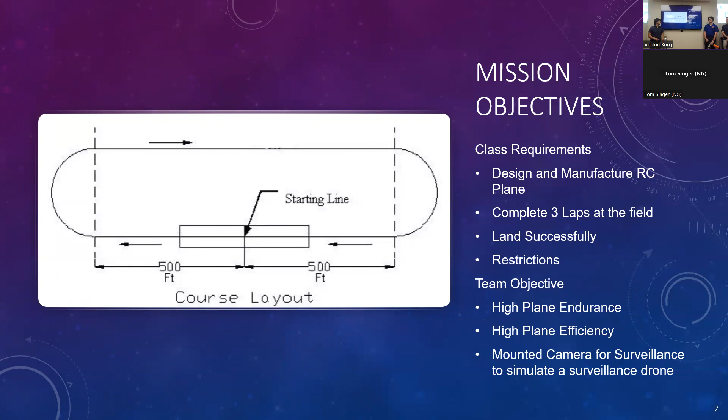And so with that, we wanted to do a high efficiency and high endurance plane, much like modeled after the U-2 spy plane. And we thought maybe in the end, we could also mount a camera for surveillance. And so that brings us to our preliminary design.

So to begin, we had to create some initial estimations for what our final plane would look like, just to get started. So we estimated a gross takeoff weight of around 7.5 pounds, and we used a similar structural coefficient from the Joker plane, which is a very successful RC aircraft that was created to be 3D printed. And so using a lot of similarities from that aircraft, we were able to create our initial estimations.

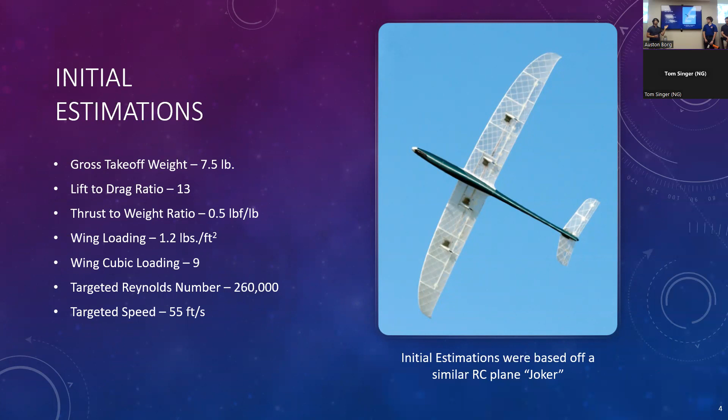We used a very common metric for RC aircraft known as the wing cube loading. It would have a score of 9, which gives it a speed a little bit higher than that of a trainer aircraft. The wing cube loading tells you what the flight characteristics of your RC aircraft will be. Using the wing cube loading, we were able to find our wing loading as well by finding out the wing area needed. And we were also able to figure out our target speed and the Reynolds number at which we would test all of our airfoils.

Okay, and so going on to our airfoil analysis, we chose between separate airfoils, the Clark Y, Clark Z, SD7062, GOE 389, and GOE 425, and these were analyzed at the Reynolds number as before. And it was pretty obvious from our analysis, which we did in XFLR5, that the SD7062 would be the best airfoil, mostly for its better stall characteristics, because it stalled at a higher angle of attack than the rest, and it had the highest maximum coefficient of lift at that Reynolds number of 260,000.

So for our wing sizing and performance, we chose a wingspan of 6.25 feet with an aspect ratio of 8.86. The taper ratio of the wing was 0.46, which yields a mean aerodynamic chord of 0.75 feet. The other parameters of the wing, such as dihedral, sweep, and incidence, were set to 0. This makes it easier to manufacture, and stability can still be maintained through airplane design as well as through pilot input.

The other control surfaces, the ailerons and the flaps, were sized and positioned through historical estimations, with 25% of the chord for the control surface chord size, and the ailerons would have 50% of the total span, and the flaps would have 40% of the total span. This wing configuration yields a trim at 2.1 degrees alpha and a loading of 8.2 pound force.

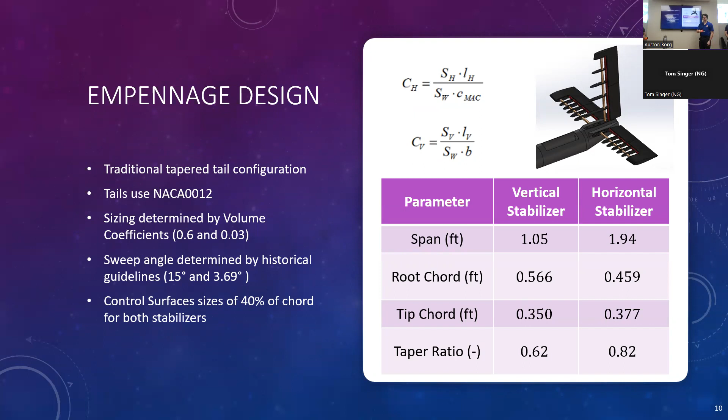And then for our propulsion system, we powered everything with a 4-cell lithium polymer battery and a 50 amp ESC for our proportional control, which was connected to our main propeller. We used a BadAss 870 kV brushless motor paired with an APC 10x6 propeller. Our main prop was located on the nose of our aircraft, and the motor and propeller combination achieved our thrust to weight ratio of 0.5 to 1 at 400 watts and 0.7 to 1 at maximum power. And these thrust to weights were calculated using our initial estimate of 7.5 pounds.

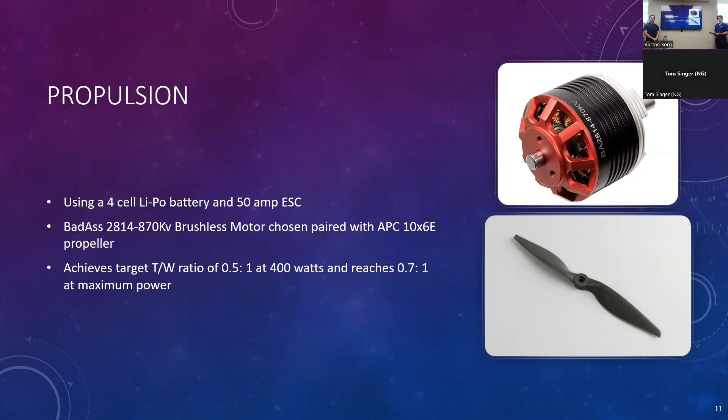They adjusted slightly between plane iterations, as we'll talk about later. We had to add weight for our first test flight, and were able to take off weight by changing our fuselage in our second test flight.

And then for all of our electrical systems, we had the provided 6-channel transmitter and 6-channel receiver. And we ended up using 5 of those channels for our flaps, ailerons, elevator, rudder, and main motor. We had 3 17-gram metal servos, 2 for our ailerons and 1 for our rudder, 2 plastic servos for our flaps, and 2 17-gram plastic servos for our elevator. And then for our proportional control, we had the 50 amp ESC and 4-cell lithium polymer battery, as talked about in the previous slide, and that powered our brushless motor.

So for the structural analysis of the wing, there's 2 load cases we considered. The first was the rapid deceleration that would occur in landing, and the wing would feel that. The second case was max speed and stall angle. We found the max speed and stall angle to be the more significant case. So our max speed was 55 feet per second, stall angle 15 degrees, and we had a weight of 5.21 and a maximum lift of 25 pounds. There we find a lift over weight of around 4.8, so we assigned a load factor of 5.

We use a cantilever beam approximation and assume an elliptical lift distribution at the quarter chord where our spar was located. Our spar was made out of poplar wood, with an ultimate strength of 3,200 psi. We calculated our maximum bending stress from our lift per unit span. We integrated that twice to get our moment, and our maximum moment would occur at the root, which is the equation right here.

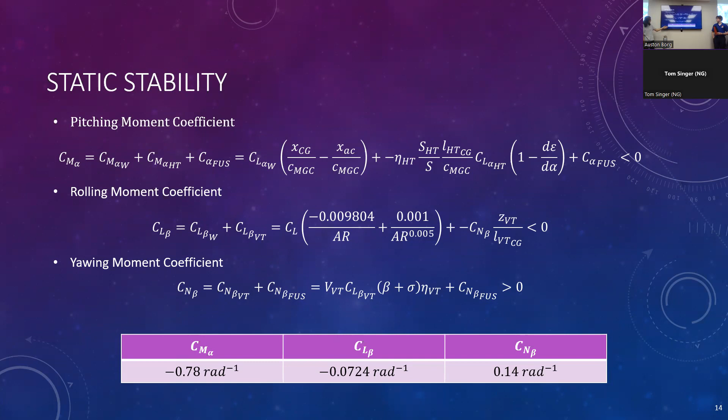The way we used these equations was by choosing 2 values. Because roll and yaw are linked, there are only 2 variables we could close a system of equations with. So we found a value of these coefficients in between a glider plane and a general aviation airplane, and we fixed our pitch moment coefficient. Then from these equations, we were able to solve for where our aerodynamic empennage surfaces should be. And here are the coefficients, all signifying a stable airplane.

Just because you have a statically stable plane doesn't mean it's dynamically stable. The way you check for that is by doing a system of differential equations where your state variables are your velocities and your orientation angles, and the matrices A and B contain the aerodynamic and inertia information. We used the most up-to-date iteration of our SOLIDWORKS file after we made the changes, and we used that in XFLR5 to determine the eigenvalues.

The eigenvalues correspond to different flight modes where, the more negative the real component is, the more stable that mode is. From our analysis, the only unstable mode was found to be spiral, but this isn't an issue as many planes are unstable in spiral, and it takes over a minute to get around 1 degree of bank angle.

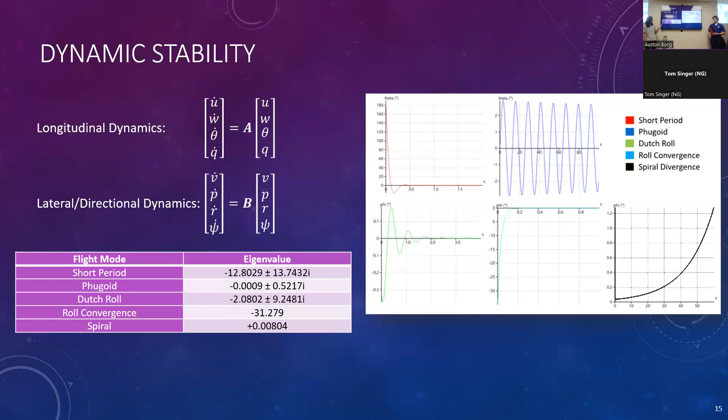The other concerning mode may be the phugoid mode, where it's just barely stable, but we weren't too worried because we were assuming potential flow, and in real life drag is a lot bigger, and drag is one of the major sources of damping of phugoid. That's indicated in our flight cases, where we didn't really see much phugoid. So in general, we had a stable plane.

All right, moving on to manufacturing of the plane. First, we started with the wings. Here is the remaining wing; the other one is not in as good of shape. We used Ultracoat to wrap the wing, which is a very cheap and lightweight option instead of 3D printing the whole wing in PLA. It is easy to cut into and make edits, which is what we had to do for putting the servo motors in for the flaps and ailerons. It was easy to wire rather than having to edit and 3D print whole new parts, which would really have slowed down manufacturing.

The ribs in here are printed of PLA, the spar is poplar, and the stringers are balsa wood. The flaps and ailerons are also just 3D printed. Basically the same goes for the tail as seen over here. The manufacturing was done in the exact same process.

The fuselage was entirely printed out of PLA. It had hatches, about 2.5 inches by 6 inches, so that we could provide access to the battery and bolt the wing and empennage to the fuselage. For the first design of the fuselage, there were none of the stringers or ribs that Drew previously mentioned, because we originally planned to print bulkheads and glue them in. But we changed this design because we didn't have enough surface on the fuselage pieces to glue them all together reliably. So we reprinted them all with little ribs right at all the edges so that we have more surface area to glue to.

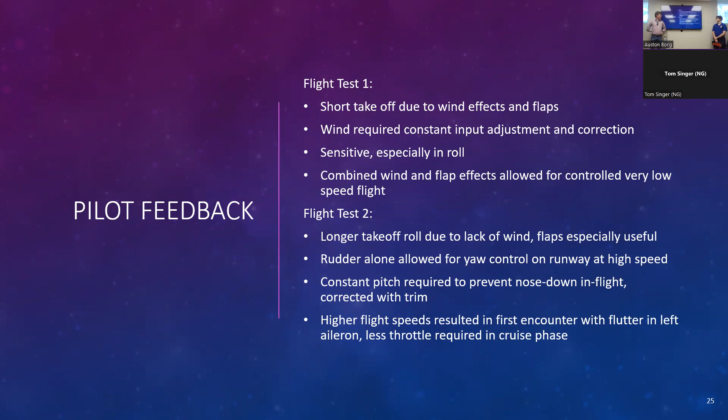During flight test 2, there were higher speeds encountered, there was less wind, so I did not ease as much on the throttle. These higher speeds during maneuvers also resulted in previously unseen effects such as flutter on the right or left aileron here. This is the particular aileron that fluttered. And these are the factors that were encountered in the second flight test. All right, and that opens us up for a Q&A.

Great job. Thank you. Tom. Hey guys, this is Tom Singer. I cringed at the picture of the crispy battery. I'm sure you guys cringed harder in real life, but you know, good job getting it up in the air. Tom, do you have any questions?

Hello? Can you guys hear me? Can you open the chat? Test 1 2. Test test. Can you hear me? Should we open the chat real quick? It seems like there's a message in the chat. No, we cannot. I don't mute. It's a red light. Check his speaker. Is there a speaker on here? This is mute. Should I press this button?

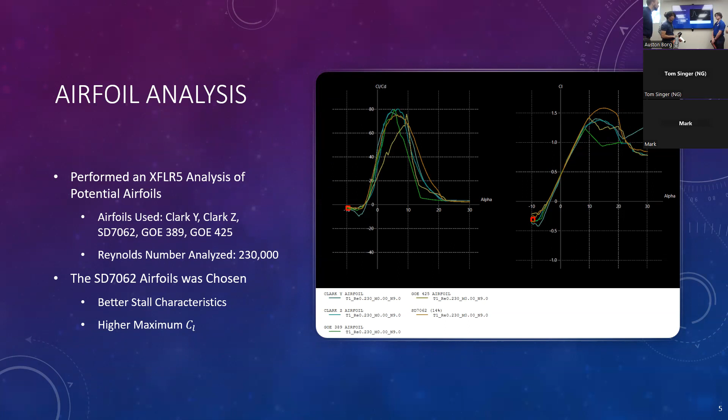And then what I think I was missing was how you get from a moment to a stress, right? So your max bending stress of 760 psi. What is that based on? Oh, just use MC over I. Okay, what cross section are you considering? Circular cross section from the poplar spar running through the quarter chord. Okay, yeah. So I'd like to see that shown here on the slide.

But that said, other than that one part of the chain, I think everything else was good. I like that you talked about, we've got a design factor of safety of 3. We've got a margin of safety based on that design factor of safety. So I think everything went well from a structures point here. I definitely would like to see a little detail of that joint, the geometry of that joint and how the loads get into the plane. But I think what you got here is pretty good.

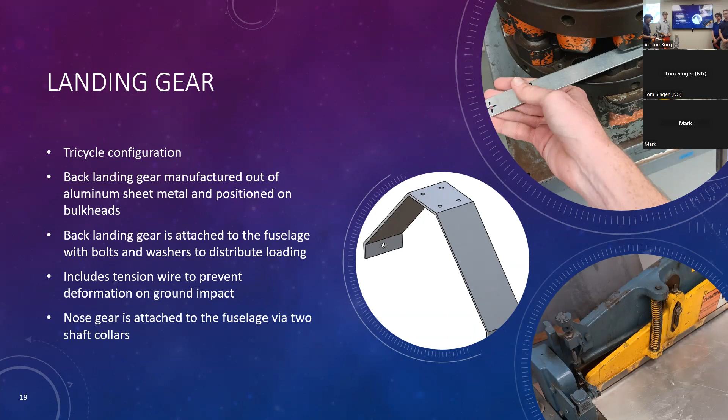And it sounded like you were well under your weight target, maybe even a little too much under your weight target, given that you had higher speeds and flutter, which I'll come back to in a minute. But also, speaking of weight, you said that you had to adjust your CG by adding 13 ounces of ballast to your design, right? And you're talking about an aircraft weight on the order of, what, like 6.5 pounds? Is that including the ballast? Yes, that's including the ballast.

Okay, so you're talking about, I mean, that's almost a pound of ballast, right? So from 5.8 or so to 6.5 pounds, 20-ish% of the weight of your airplane is just ballast, right? Like how did we miss that much on the CG? It was a combination of not paying attention to the size of the nose in comparison to the position of the wing, as well as not considering the amount of weight located on the empennage and the effect it would have on the overall CG.

Okay, so was your CG too far back and you ballasted the nose, or too far forward and you ballasted the aft? It was too far back, so we ballasted the nose. Originally without the weight, it was at like the half chord point. Yeah, we wanted to move to the quarter chord. Okay.

Were you one of the teams from a month ago that said you had some ability to adjust the CG by moving the location of the battery? Yes. I'm guessing that you didn't have enough motion in the battery to get your CG where you need it to be? It was as far forward as it could go. We just needed to make the nose longer. That was the only option.

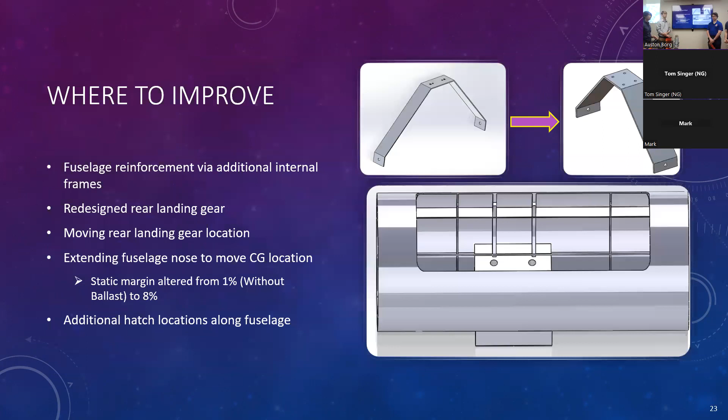Let's see. So, flutter. I've been doing these for a couple of years now, and I know that Ting has done a couple of different RC airplanes, and you guys are the first ones that I've seen have an issue with flutter. So I know you said your speed was higher than you were anticipating, and that can certainly cause those sorts of issues. But did you do any sort of analysis to say we don't expect to have flutter at the speeds you were initially predicting? And do you have a solution for that other than fly slower?

We did not have any predictions for flutter to my knowledge. The particular cases where flutter came through, it was during a maneuver where I went from high altitude to a low altitude-ish pass, where I gained speed by trading altitude. And that was a much higher difference than I was expecting because I was also at higher throttle than I should have been. So combined, those made for higher speed, which had higher flutter on this left aileron.

One issue was our wing was not stiff. We don't have a spar that goes through both wings; there's a spar that goes through the one wing and a spar that goes to the other wing. So before our flight, we tried to lift the plane from the wingtips and the fuselage wouldn't go up. It wasn't stiff enough. And we didn't do any analysis for flutter, but we should have realized that a lot of things weren't really stiff in our plane. So by going faster, we just encountered it.

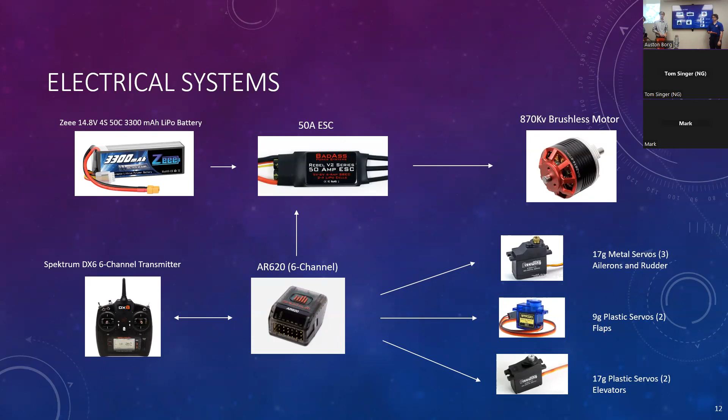And one thing in the structure analysis is, first, for the material, I think you guys use poplar wood for the spars, and also balsa wood for the stringers. Why use different types? Give me justification.

For the poplar spars, that was because of ease of access through retailers such as Lowe's and Home Depot. And for the stringers, it's easier to bend the stringers when shaping them into the ribs so that we can have diagonal stringers, so we can have a little more structure to the plane. Also, it's super lightweight overall. Poplar's a little less light and a little more stiff.

Yes. That's why in your calculation, you should not use the bending strength of the poplar wood, because it's not really carrying any normal stress caused by bending. It's at the neutral surface, and the stringers are at the top and bottom. So probably there's some calculation mistake, right?

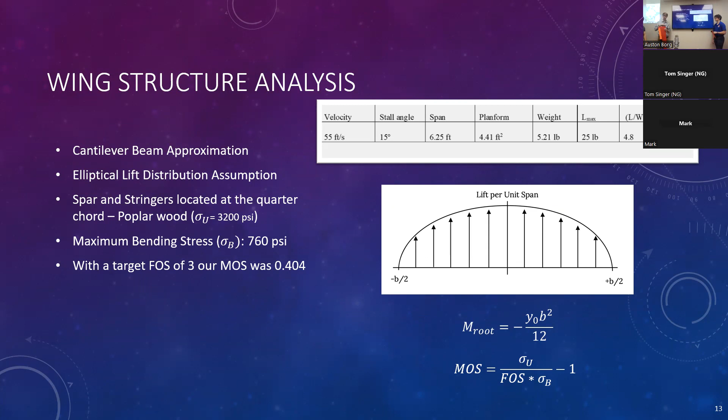And I think there is one slide that says torsional bending. Sorry, I didn't wear my glasses, so I cannot see the page number. Yes, torsion. So on one slide you said torsional bending to prevent something sliding out of the connection part, the tabs. Why torsional bending? That is a pure bending problem, right? Torsion will not make the connecting place slide out; that's bending.

And also, I really don't know what torsional bending means. Torsion, bending. So first, if you want to prevent something sliding out, that is from bending, not because of torsion. Torsion is rotation. So just make it more accurate in your final report.

And the other thing is the tension wire for the landing gear. Is that plastic or something? Fishing wire. Fishing line. Do you think that really provides any strength? It's rated for 80 pounds. So without it, it would actually spread out. We tried it, and we had the wire not on it.

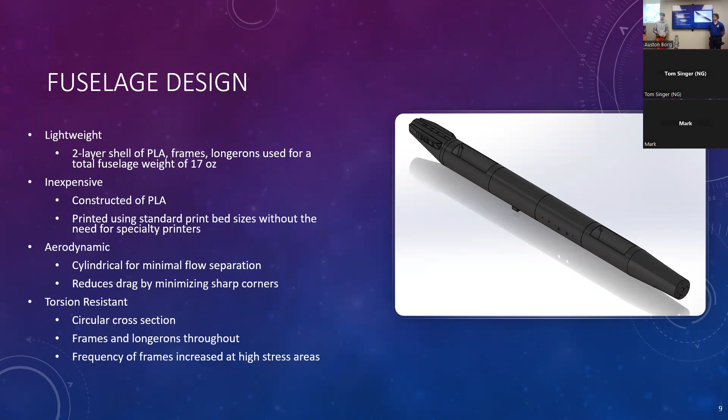So you did the presentation on the second test flight and you put all the fault on you instead of a design problem. Yeah, appreciate that. I thought we were pointing one direction when we were pointing the other direction, and I overcorrected. So what I want to say is, is it really a pure piloting problem or is there any design problem that caused flutter? You said it's purely caused by high speed. Is it really because of high speed, or is some design thing that caused flutter? That's what I want to know.

There is a consideration of the gap between the back plate of the wing and the control surface. This is not accurate since I pieced this back together, but this is kind of what the gap is that we're talking about. Would it be a larger gap here before the second test flight? You said you put this back after the second test flight. Well, yeah, because this broke on landing, so I just put this back together. But the original gap is larger than this one? I don't know if it was a larger gap or not, but it's probably around a similar size. Okay.

So I don't know, I'm not an expert. So I just want you guys to do some research on what actually caused flutter. I don't think it's 100% because of piloting skill or high speed. It's not like 100% his fault. So in the final report, I hope that you guys can do some research on what it really is. In part, the lack of stiffness in the wing may have caused it.

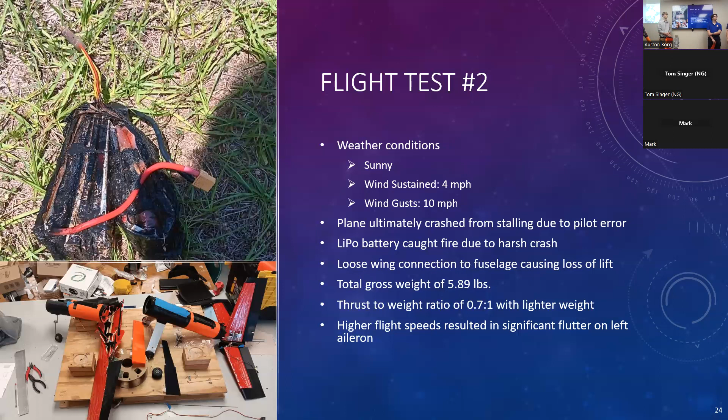So I think earlier, it might have been you, Brendan, who mentioned this. Correct me if I'm wrong, but somebody mentioned stability from pilot input. How reliable is that? And what kind of stability are you talking about from pilot input? So this is from when I was flying. Slide 6, if you want to go back to that.

Oh, yeah. So basically, in stability analysis, that was where we had more concern about phugoid and spiral modes, where if the pilot would notice phugoid, that's easy to just resolve, or spiral, that's easier because of the time over which it elapses. The pilot response time is much quicker than the period over which it occurs. Okay, so you're specifically targeting the spiral divergence, right? The one where it's like 2 minutes long. Exactly. Okay, just making sure.

Let's see. So you showed on slide 7, I feel like that figure on the bottom right is a little hard to understand if you hadn't seen it before. And I also have a question about the control horn. Why is it designed like that? What's the shape for? Is there a specific reason? This is to provide the control horn maximum deflection while being able to accommodate various lengths of control rods.

So we couldn't ensure that each control rod was going to be of uniform length, which it wasn't. Since some of them were so short, they required this to be closer to the edge of the control surface. This helped it reach the control rod and have maximum deflection. During manufacturing, we had to move them around, rotating the servos or hitting them on different points. Sometimes they broke. Yeah, that's it. We did address the servo stuff.

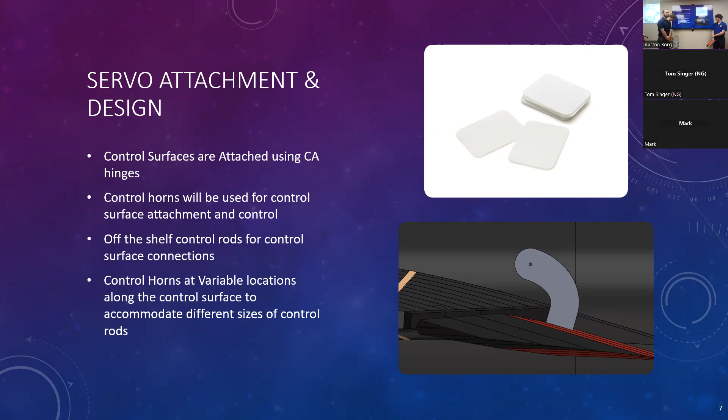Okay, slide 17. John, I believe you mentioned something about the Monokote being lighter and cheaper and easier to use. Easier to manufacture, for sure. So how much cheaper? Do you have a metric that you compare? And one other question about the weight. What weight savings did you get? Well, the Monokote is almost negligible weight. It's a very thin layer of plastic. The whole thing's probably less than an ounce, right? Yeah, for both wings. And how about cost?

The whole roll was like $18. I think that's what I bought. It was about 36 for 2 rolls, which was the total cost to manufacture. A roll of PLA is also like $20. I bought some for like $18. So in terms of manufacturing, probably both wings might have been about a roll, maybe.

So you guys didn't necessarily have a metric, because you were saying it's cheaper, but how much would have been a nice way to put it, like, this much square footage of PLA is this much or something. Yeah, actually, I have the same question I didn't ask. So let's say I give you a chance.

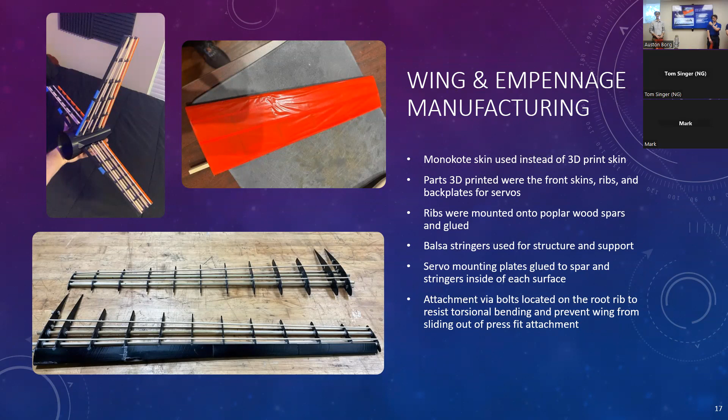On slide 21, you were discussing your payload. You said that you mounted it to the top of the battery. Did you consider any effects or concerns about mounting it to the top of the battery, in terms of electrical effects? What if the increased weight on the battery caused the battery to dislodge? Are there any safety measures to prevent that? The only safety measure was that the battery was taped as well as Velcroed.

I think the only concern from my end would be heat transfer from the battery to the container itself. But there was a vent hole used for the wiring that was directly in the way of the container. Yeah, so you did take a secondary step, you taped the battery down, so that's good, because I was concerned that maybe it would move, but obviously it didn't. I'm just addressing it.

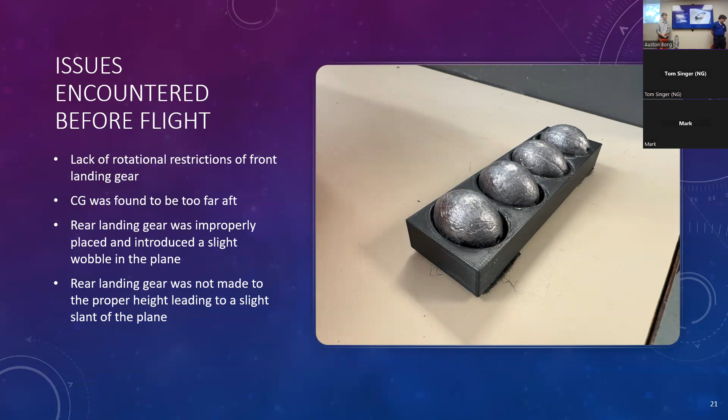Valid. And then we discussed slide 22 on the takeoff, that you didn't actually take off along the runway, you instead took off, from what I heard, perpendicular. Yeah, the taxiway, we were on an angle to the taxiway directly into the wind. Did you calculate it? Could you have made it? Did you just send it, or were there any calculations before? We sent it. I did not want to fly that day.

The reason I bring this up is because your landing gear wheels are really small. To me, that indicates you weren't planning on taking it off-roading. So was there a consideration on changing the wheel size, or why small wheels? There was a consideration for the second prototype to up them to 4 inches to accommodate the new landing gear structure. In consideration of time to get a second flight, we decided to just send it. But that would be a good option for off-roading, for bush plane style landing.

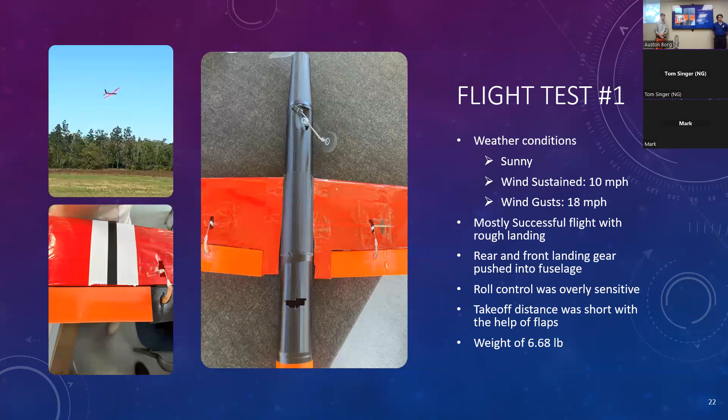Okay. And another thing about the flaps, I didn't fully understand why you chose flaps. That message wasn't conveyed. What does it actually do for you? Did it reduce your takeoff roll by this much? Was there a significant need for the flaps? During test flight 2, we didn't have much wind to help us take off, but we had the flaps enabled for the takeoff, which was pretty long on its own. Without the flaps, I think it would have been longer.

Okay, that's different than the mathematical stuff. If you have that, definitely include it in your report, saying the flaps allowed us to take off at this speed in theory, and shorten our takeoff roll. Obviously it's probably different in real life. Therefore, it's justified. We have a justification for why we added complexity to the system. Okay, we discussed the surface flutter, the left aileron fluttering.

Okay, that's all I have. If you have anything? I think everything I had got addressed already. Otherwise, great job. Great presentation. And glad it flew. Yeah, it did fly.